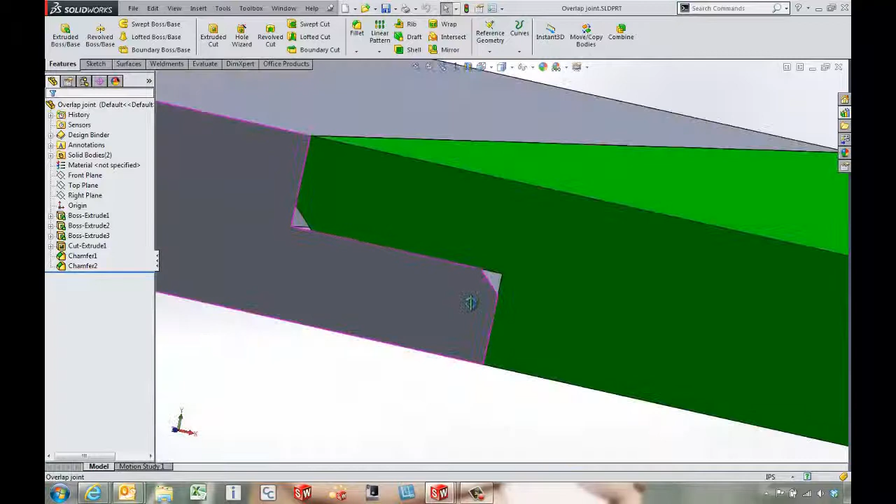An overlap joint will allow us to go in and get quite a bit more surface area for gluing. And what we've also done is put in a couple chamfers here and there to make the parts maybe fit together a little bit better. So there's an overlapping joint. We've got another type of joint, maybe a double overlap. This is more of a pin insert into the part, and this rib runs full length through the entire part.

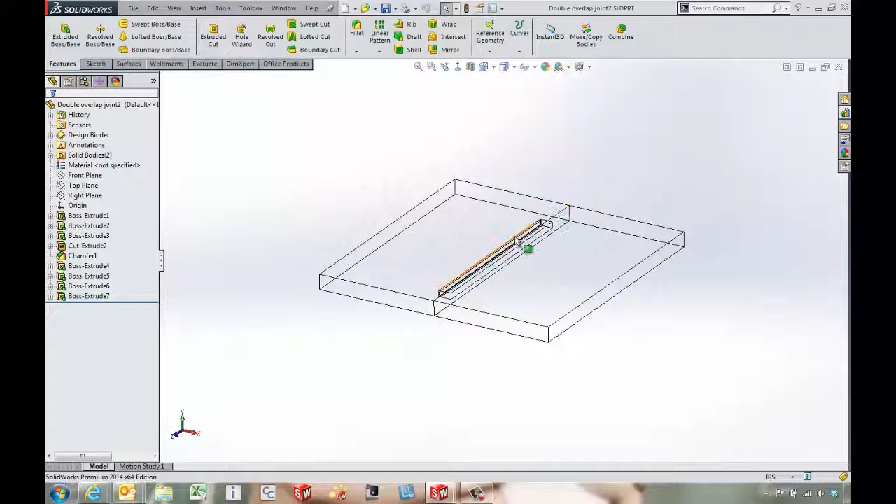We've got another double overlapping joint. This time what I've done is I've just gone in and kind of encapsulated the joint inside of the part. That way we've got nice seams on the outside of the joint when we go to put the parts together.

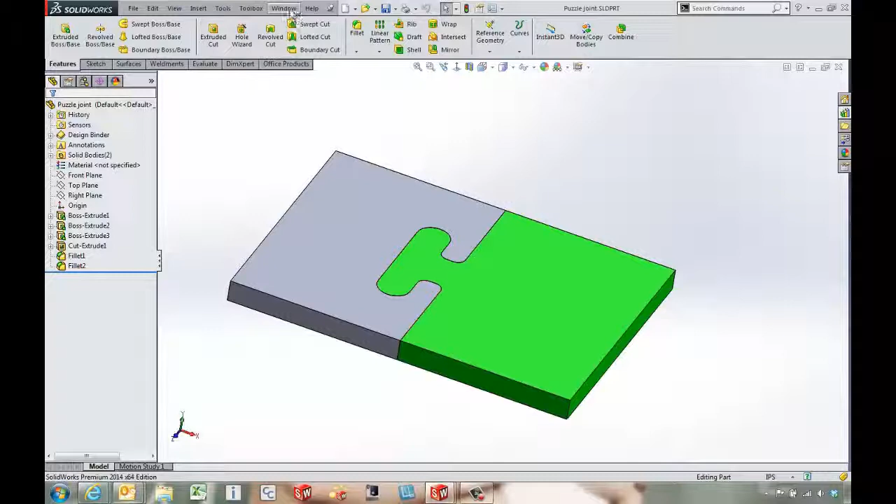Here's a couple of other examples that we can look at. I've got a puzzle joint. This is a nice strong joint for our part, and it keeps it from sliding left and right. It still can move up and down if we have enough slop in our part. So here's another example of what we might be able to do with an overlapping puzzle joint. A lot of times people don't want that puzzle joint to be seen on the top side, but on the bottom side we can come in and still have our puzzle joint.

So let me come in and hide these bodies one at a time. We've got a male joint there. And then if we come in and hide this other guy, show him, we've got just a female slot for the parts to fit into. And you're probably going to need a little bit extra clearance here and there depending on the geometry to get the parts where they'll slide together.

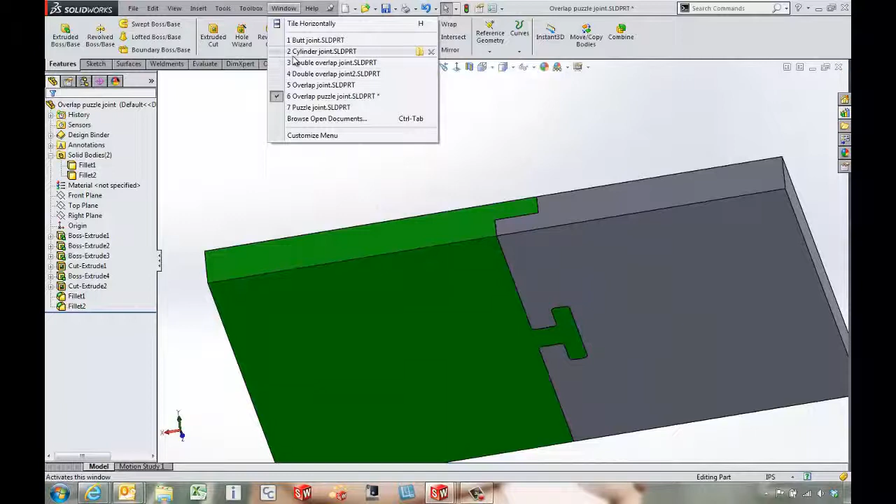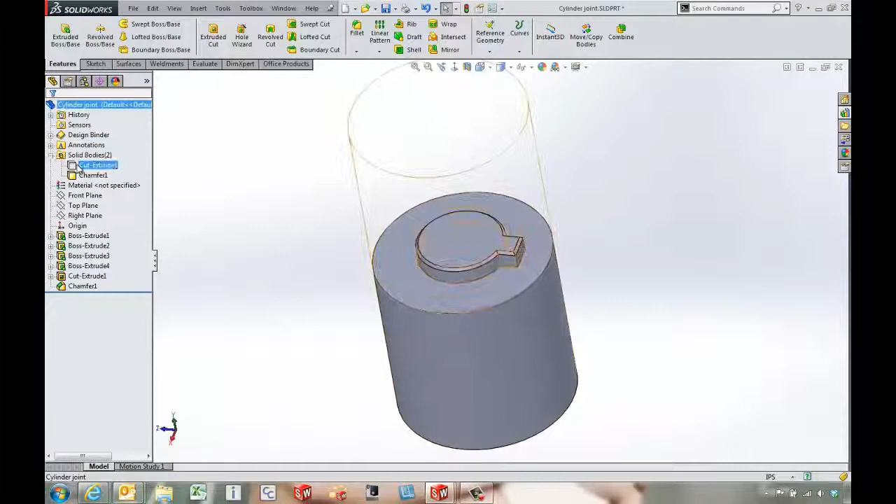Now these are all examples of things we can use for nice flat joints. Cylindrical joints are another story. If we come in and take a look at these parts, what I've done is I've just got a simple circular extrusion with a square rectangular keyway. I've added a little bit of a chamfer to the top edge of the part, but on the adjoining part I've gone in and I've cut that same pocket into the part. But I've done it a little bit differently.

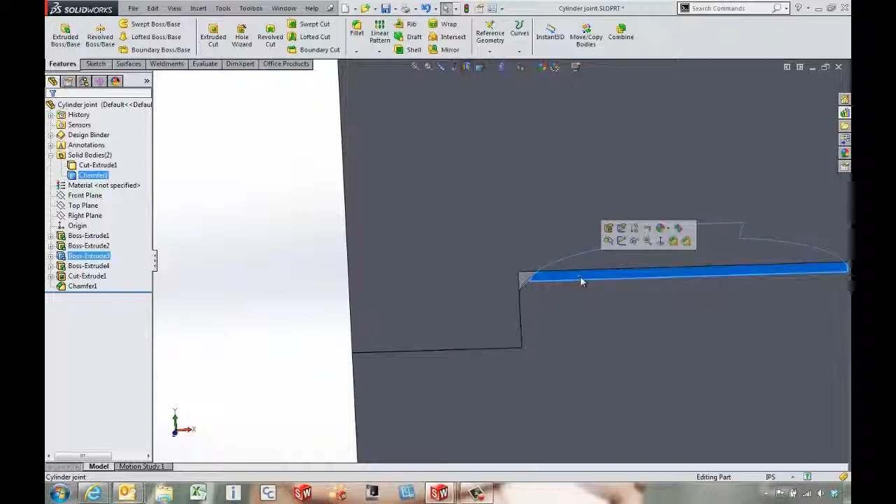If we come in and look at a section view through the part, I want to go ahead and make the cutout into the part a little bit deeper than the male plug. We don't want it to bottom out on this top surface. We want to give it plenty of clearance to the top there. Again, another little chamfer to see how it fits in there and slides in.

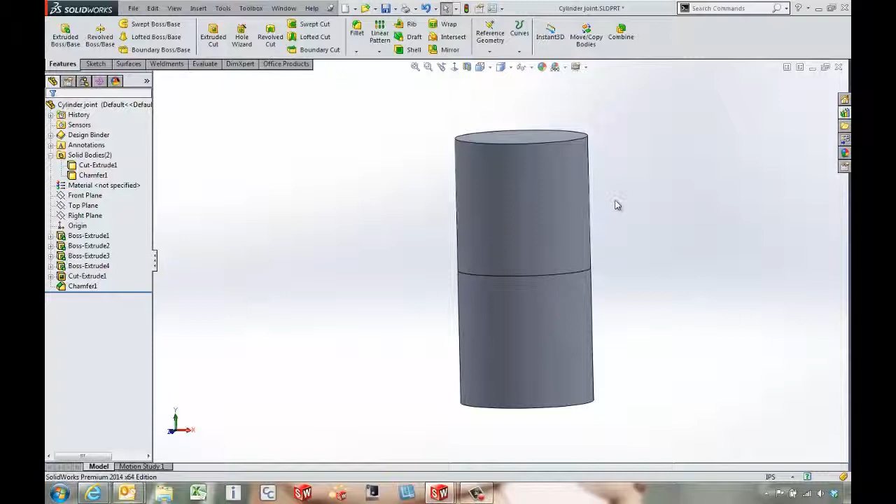So depending on the geometry, you're going to have a couple different things you can do with a lap joint or a tongue and groove type situation. But the idea here is just to get kind of creative and think outside the box to get your parts where they'll go together. With this example with the keyway, it'll keep these cylinders from spinning, and they'll lock in the correct orientation. We just want to give it plenty of strength and gluing area, and a nice way where we can split the part up to print it in multiple builds.